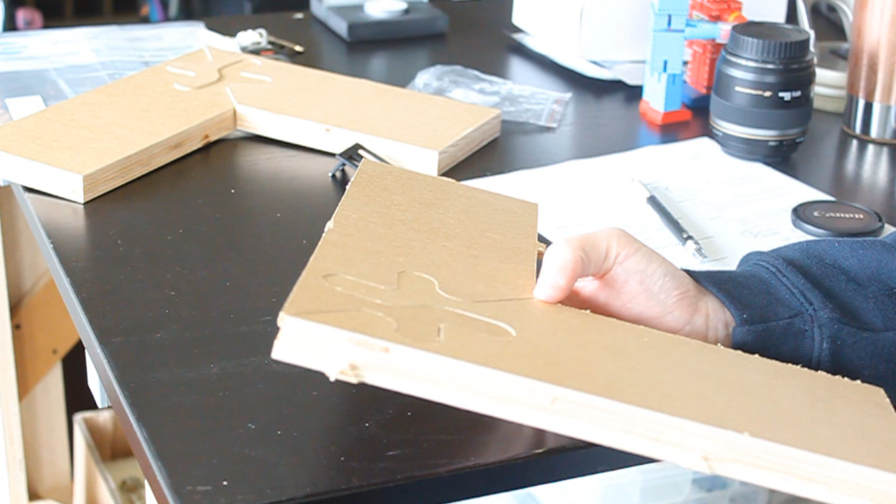In this video, I'm going to show you how to make a flat joint. It's a complex jigsaw type joint, and I'm going to make it a little bit more fancy than the standard joint. But in that, I had some challenges.

The amount of material matters because of vibrations, and you can see that there's a little bit of a sawtooth issue here. Getting the depth perfectly right is an issue. So for this particular type of joint, since it's two halves fitting together, you need to make the half depth perfect, and your spoil board needs to be perfectly flat and surfaced. Okay, let's get started.

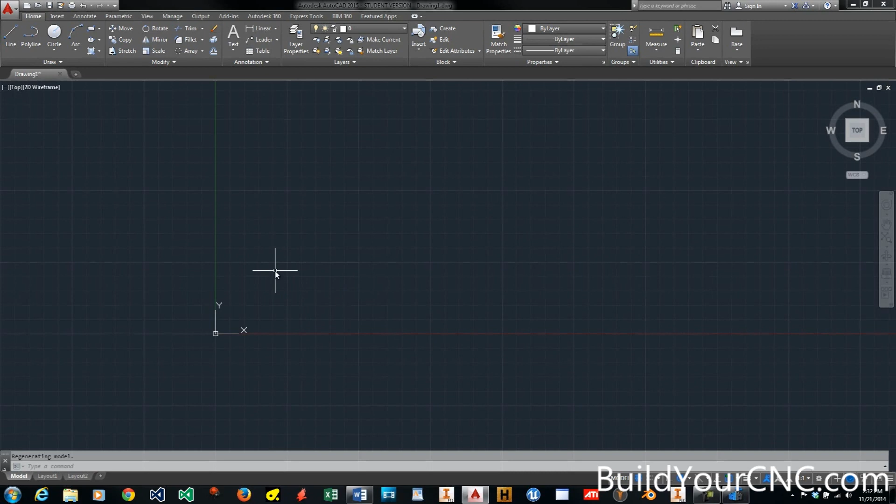I'm going to start out with 4-inch pieces of wood, like last time, but in a flat arrangement. I'm just making a line and I'm offsetting it by 4. I'll make it a little bit longer so it looks a little bit more like a frame.

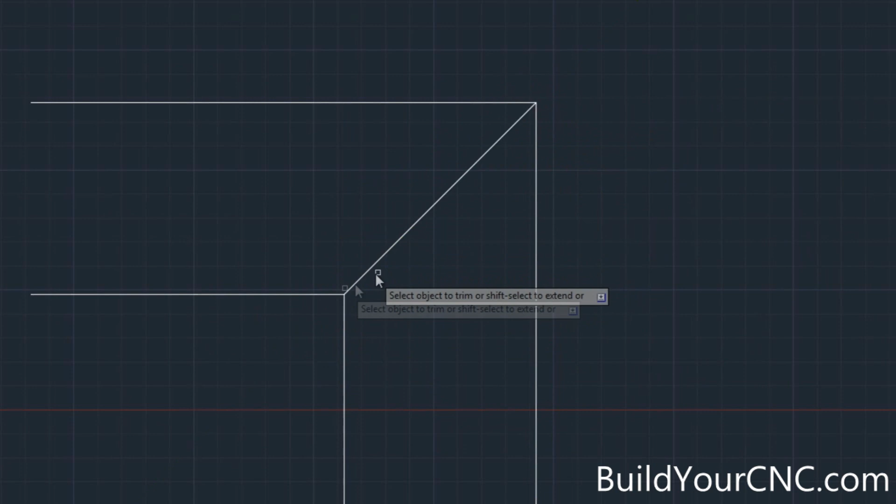And I'm going to mirror this at a right angle. A standard miter joint would look something like this. You can see it's generally just one line.

With a more complex type of joint, we just want to take a line and sort of move it around and then meet back at the other corner. But you want to make sure that there's enough corners around here that allow it to be locked in place.

For instance, say I'm just going to make a joint like this. You can see that the joint is here, but it doesn't really do any locking. You could still pull it apart.

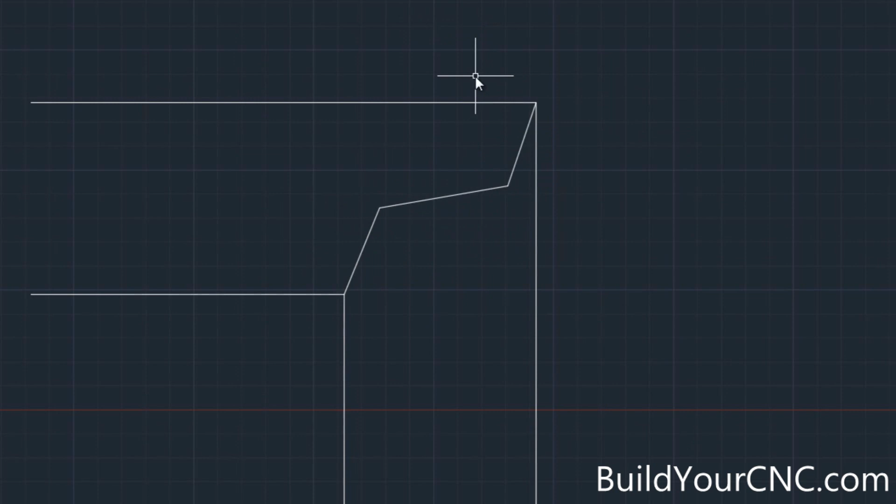Let's go back to the other form and let's get a little bit more drastic here. Now, this type of joint, you can see that you'd be able to lock it in place. You wouldn't be able to tear it apart.

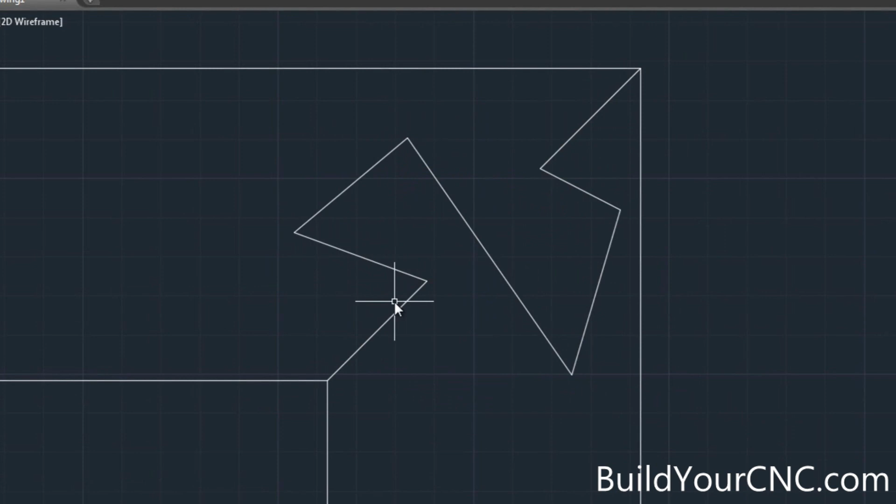And from here, you'd need to consider the size of the bit that you're using. So we're using a 1/4 inch, so you'd need to make the radius of all of these corners at 1/8 of an inch. And there you have a general joint.

But there are a couple problems with this joint, and I'll show you why. If you draw these lines, you'll see that the joint exceeds or goes across a boundary that we don't want it to. Because if we have just a straight piece of wood, we wouldn't be able to get this material all the way to the outside of this particular line.

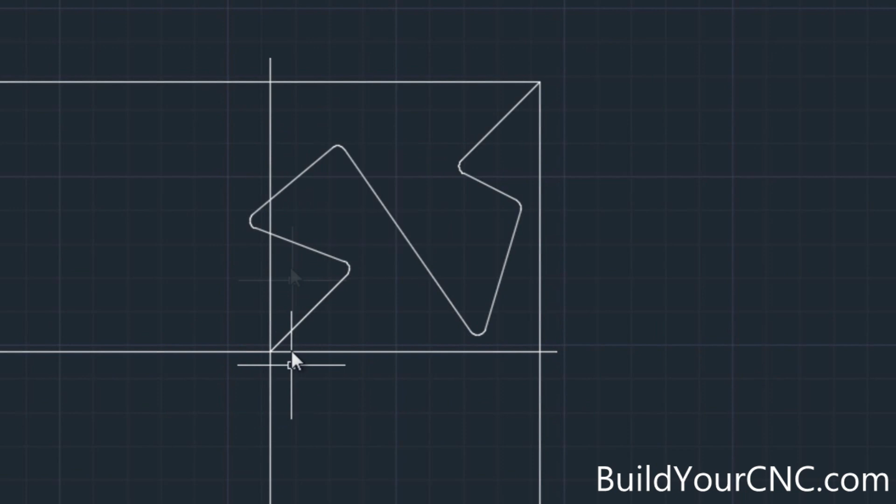So we need to work within this square. So let's remove this. And I think we can do better than this anyway. There's a lot of designs that we could create that add an attractive feature to the corner of the wood. Let's go ahead and put these other lines in here so we know where our boundaries are.

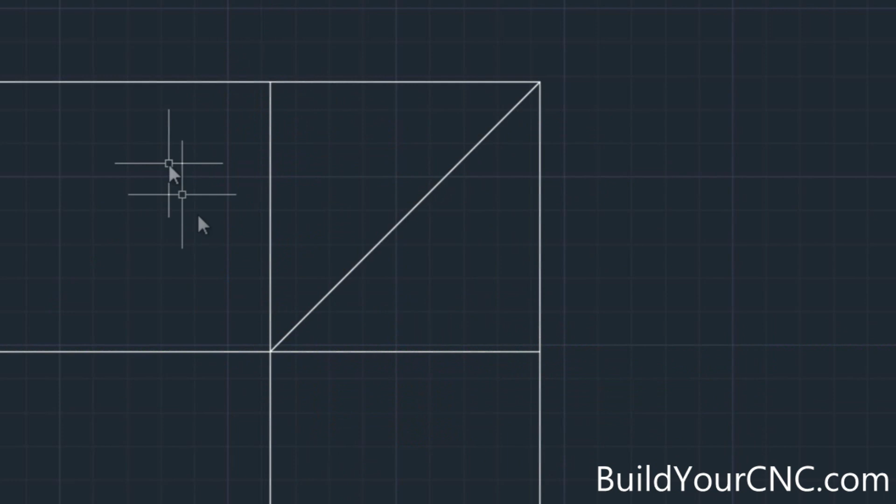And I'm going to create just a simple X pattern here. Let's experiment with this a little bit. I'm not sure I like that. Let's go with a circle.

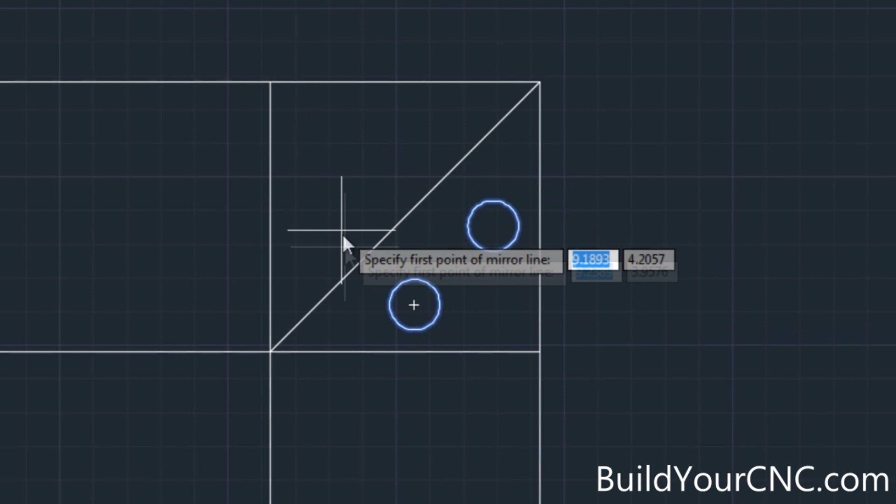Let's take the circle and mirror it. Yeah, that looks good. And then mirror it on the other side. And we'll take tangents. Let's get rid of some of the lines because it's confusing me a little bit.

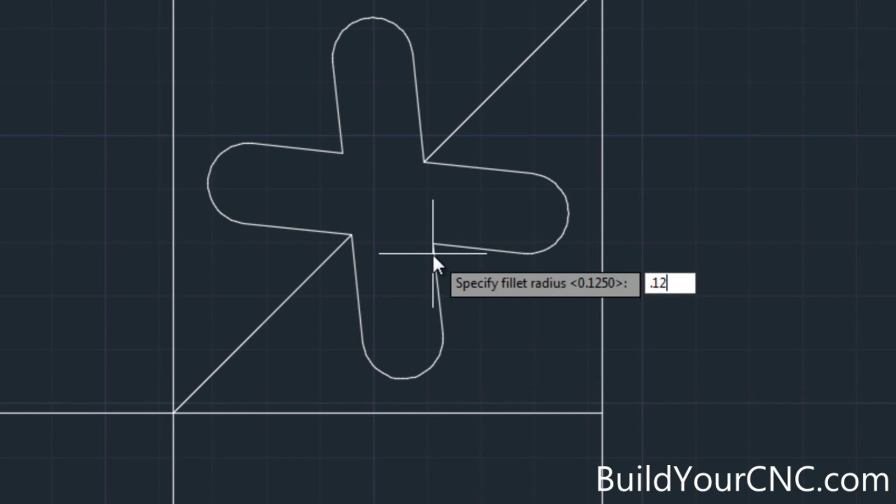We know these corners are going to need to be rounded for the size of the bit, 1/8 of an inch. And then I'm going to take this one, round it out here, and then this one is going to be rounded over here. I'm going to use 0.5 for that. Oh, that's going to be too big. 0.25.

And then just connect these. And I'll round these out. But we can see that there's a little bit of room. The end mill would have to be able to get through this area, cut all this stuff out, and then leave all of this material here, and then the opposite on the other piece.

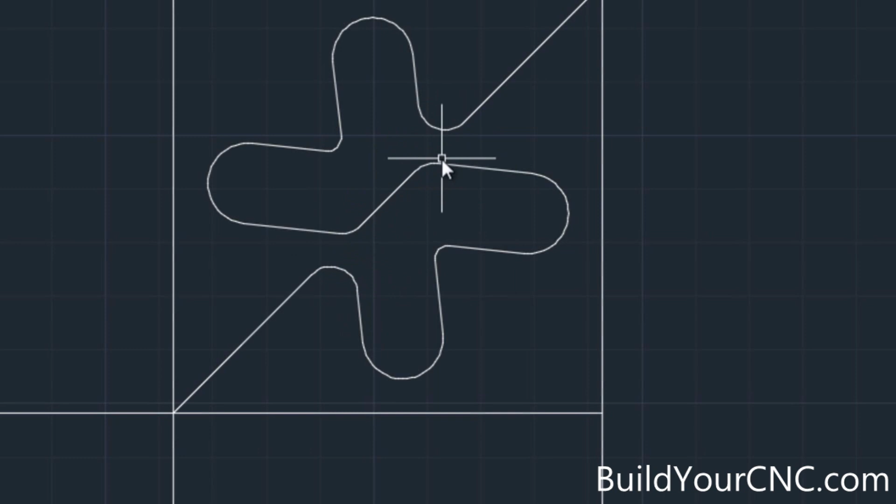And also this piece looks like it's really brittle, so it could break easily. So we'll increase the radius of the radii of these curves, and then also with this one. I'll start with these two since these are the smallest. Well, actually they're all the same, so I'll start with this because it looks like it's a tighter corner and it could use a little bit more smoothing.

Doesn't look like it went enough, so I'm going to try it again. I'll try 1. No, that's going to be too much. 0.75. That should work. And then I'll increase these a little bit more.

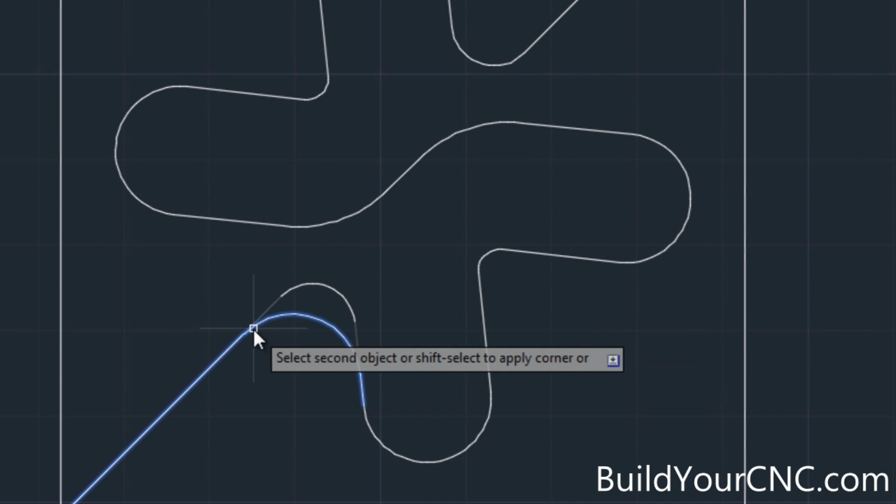Now this looks like a joint we can use. It looks like we made sure that it doesn't go outside of the boundary. I'm going to erase that, erase this one, and that's what the joint will end up looking like.

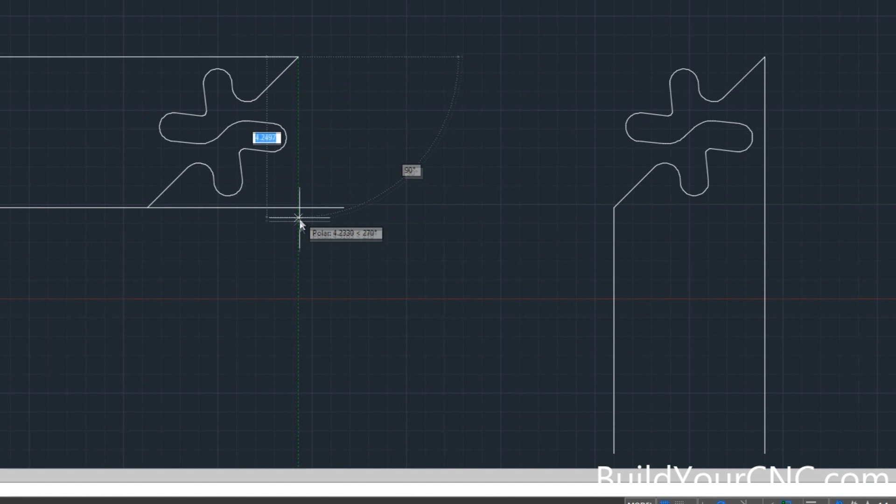So we're going to create 2 pieces from this one. Just make a copy, and I'm going to generate both of these pieces like this, but I'm only going to pocket this piece halfway through the wood. But this one will be halfway on the underside, so I have to make a line here. And I have to mirror it because the CNC machine, since it's only 3-axis, it's going to be able to do the pocket from the top.

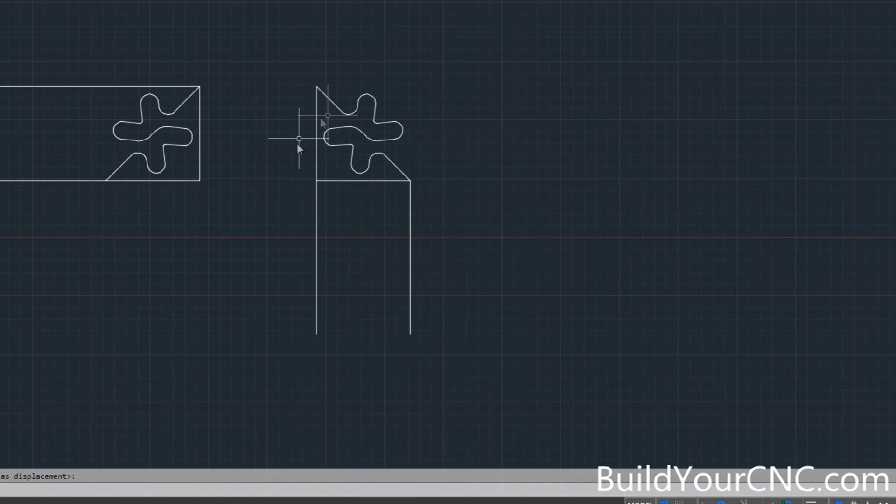So I'm going to mirror this. This way I can remove all of this material halfway down the wood. This will be the full wood thickness, and this would be the full wood thickness, and this part here would be the half wood thickness. So this would be able to marry itself very easily into this portion.

In the last video, in the finger joints, I used a 0 tolerance between this line and the other line, or the fingers. In this case, because there's so much geometry, I'm going to want to create more space between each piece, the puzzle piece. This puzzle piece, because this has more surface area for this portion of the wood to use for structure, I'm going to make this one the tolerance.

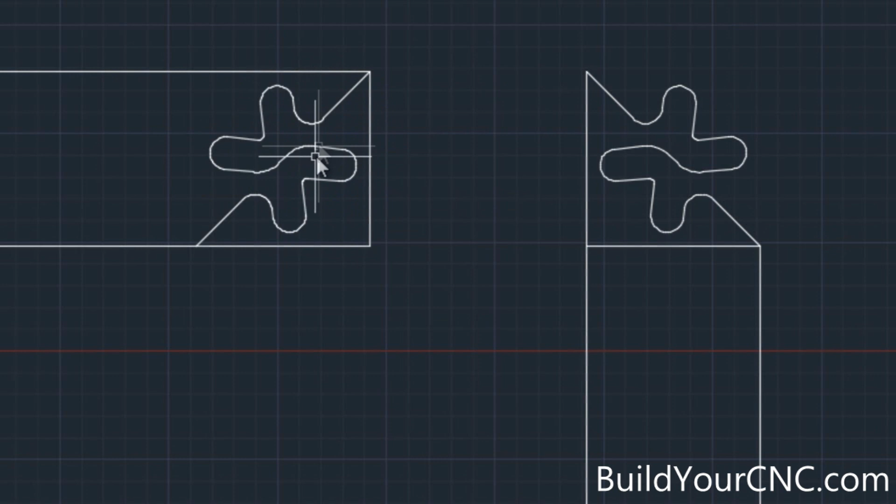I'm going to offset this geometry and make it smaller, so when this geometry fits over it, it should fit nicely. I'm going to try 5/1000ths of an inch, which is half of 1/100th of an inch.

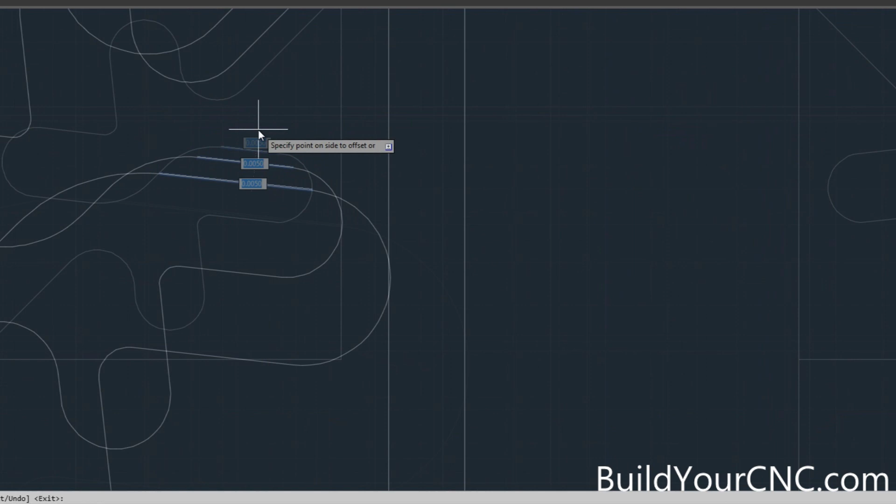This looks like it's really a small amount. I'm actually going to increase it to 1/100th. I'm not sure what I'm going to get, so I'm going to do a test at 1/100th and see what happens.

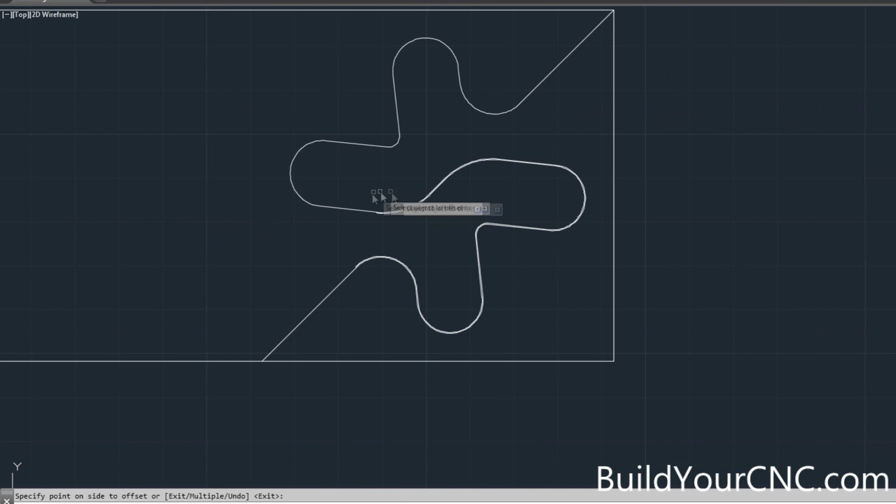Actually, I just noticed I'm going to have a problem right here because I'm making this circular area smaller than the bit is, so I'm going to have to make that a little bit larger. I'm going to delete these first, and I'm going to have to do that to both of these. So I'll make it 0.2. Yeah, that will work.

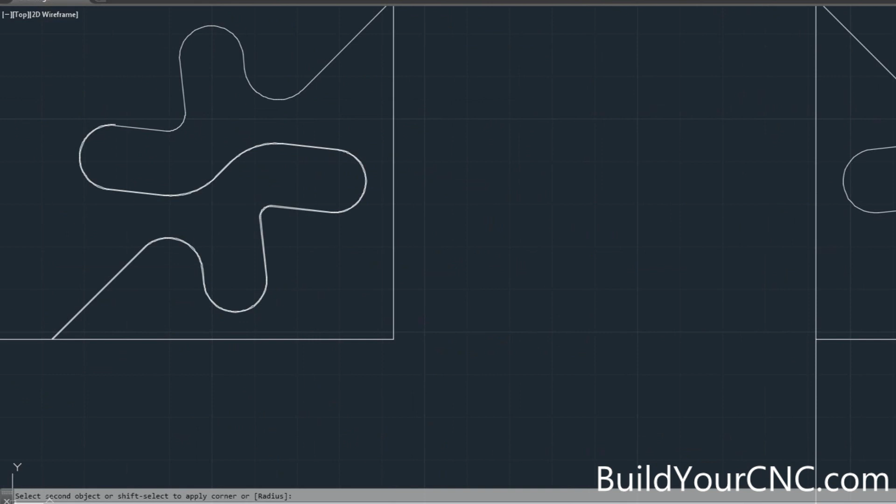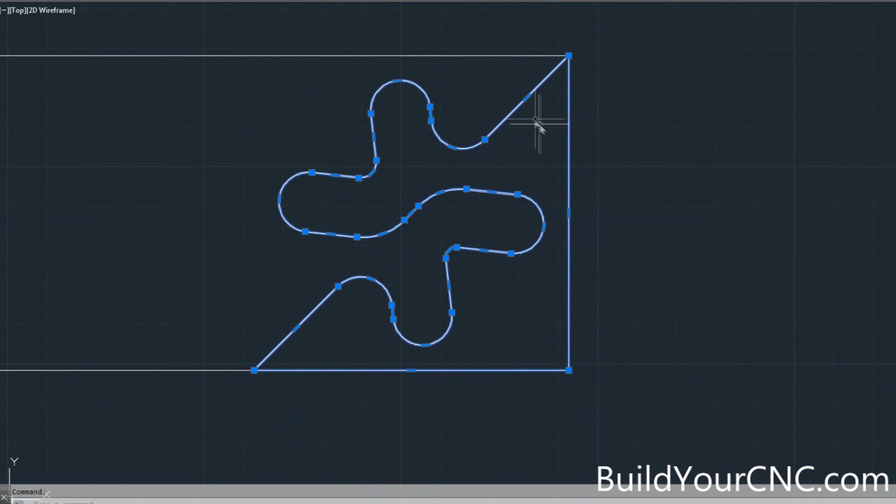Okay, I'm going to get rid of the original line that was there. Actually, I'm going to make this a polyline so I'll make them both polylines. I don't want to have these lines part of it.

Okay, so this one is 1/100th of an inch smaller than this one here, or offset. I'm going to put this back on here to see what it looks like, and see how I can treat where this ends up and this one does.

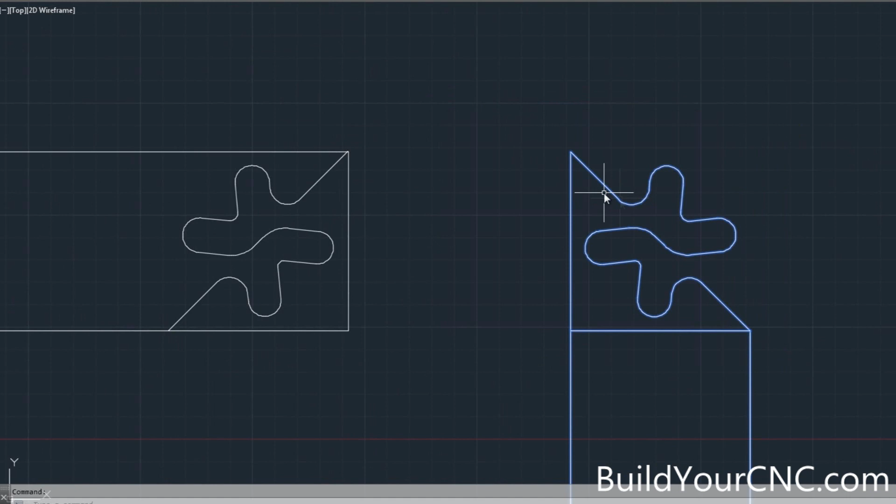So I'm going to turn this one into a block. I'm going to mirror it, move it right back where it was at that corner. So we can see this is the difference in space that we have from one to the other, and everything looks like it's right and offset.

So I think I'm just going to want to trim this off here. That should be fine. And this one, I think I'm going to trim it like so. Actually, I may not be able to do that with CNC, so I'm going to extend it. That way I can create some kind of pocketing that goes outside of this line, and it makes sure that it gets a good corner here.

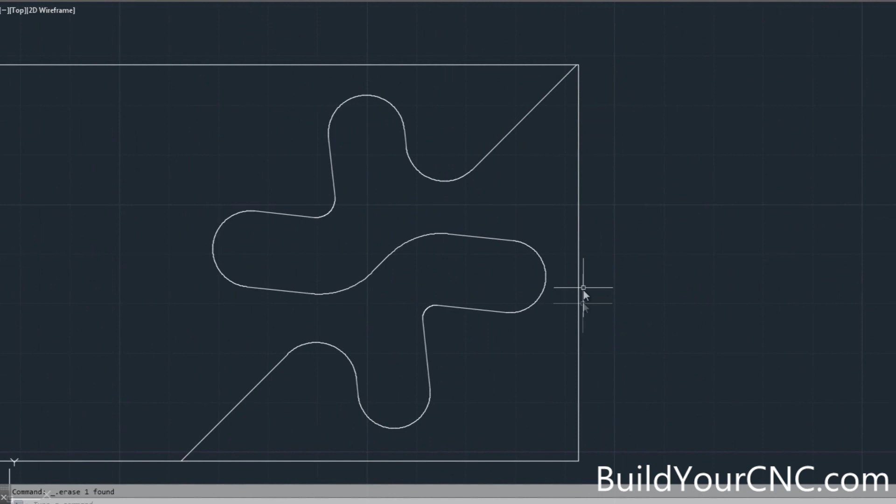Okay, I'm going to delete this and create a polygon that represents this pocket. I also want it to go outside of the bounds when pocketing, to make sure there's a nice corner around this edge. I'll use the BO command, the boundary command, which is really cool. It creates a polygon boundary. You can see it made a nice polygon just by doing that one command.

I'm going to make a little space here, break this up or explode it, and offset it to the size of the width of the bit. I probably only need to go half the width, just to make sure it gets to this point. I'm going to get rid of that actually.

I'm going to offset it 0.125. Yeah, I don't think it would hurt to go a little more, so I'll go 0.2 just to make sure. I'm going to take a half circle, and I can get rid of this line here. Look at that, that's why I didn't extend all the way.

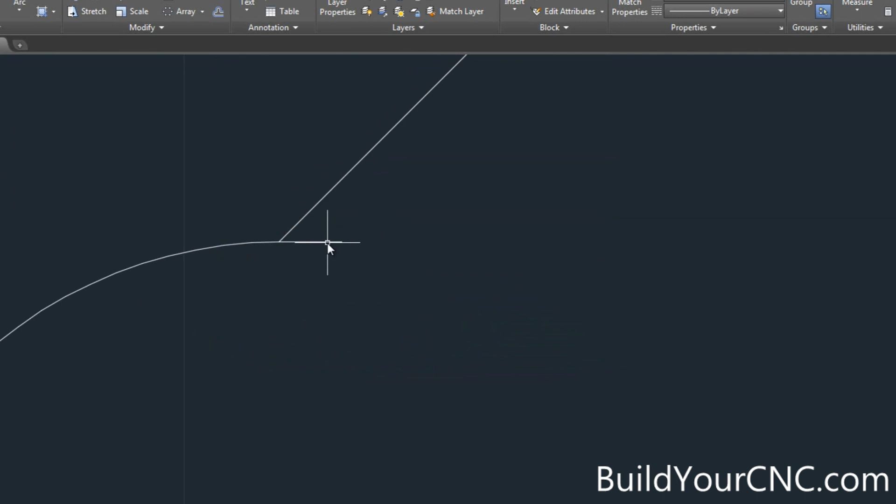So my bit will go all the way out here and create a nice corner, making sure it gets all of the edge. I can round off this corner here because it's in an inside pocket. This is an interesting case. I could extend this and then extend this line as well so it meets up with this line, but I'm just going to do a larger circle from this point.

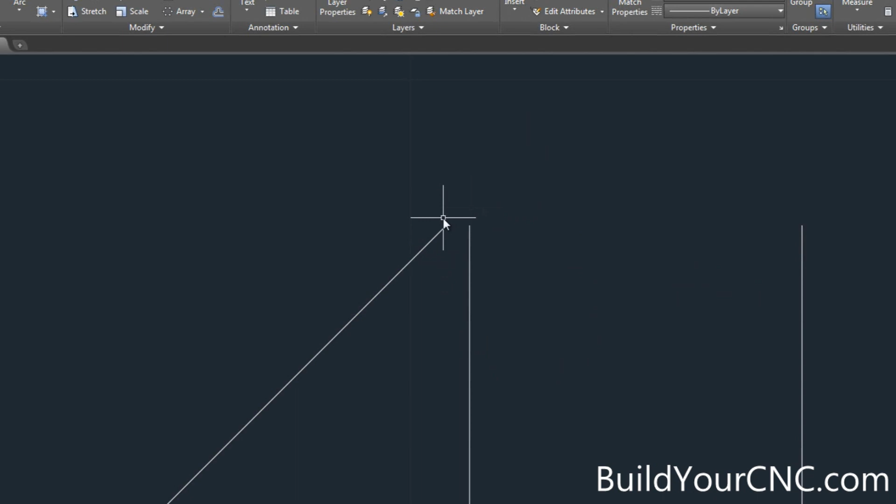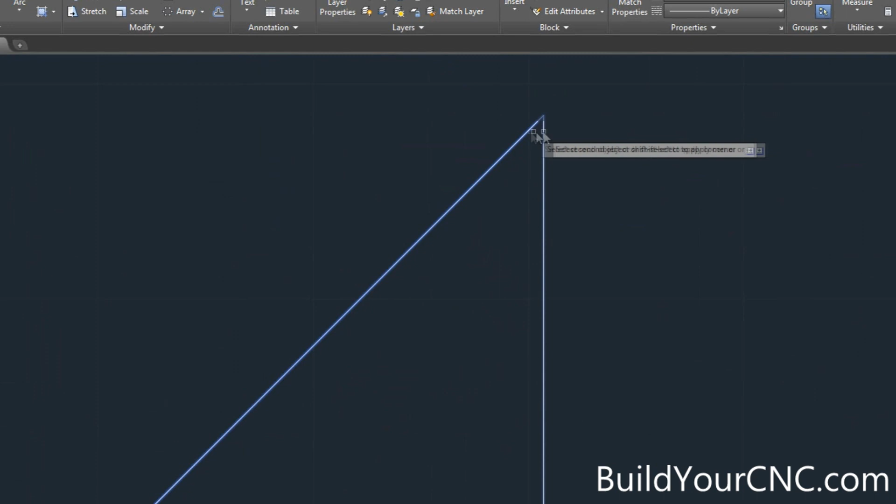On second thought, I'm going to undo all of that because I want to go out the full width of the bit—I just realized it won't fit inside that area. I'm going to extend this all the way here. So offset 0.125—oh, I'm sorry, 0.25. Now my circle.

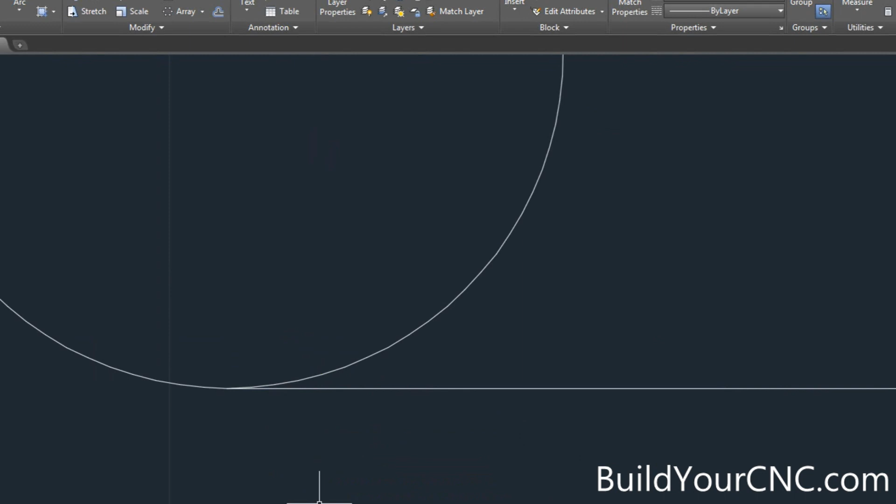Okay, this looks better. I'm going to make this back into a polyline. I can move any one of these points back. There, okay, so it'll pocket all of this out, and then I need it to also pocket this portion, so I'm going to do the same thing.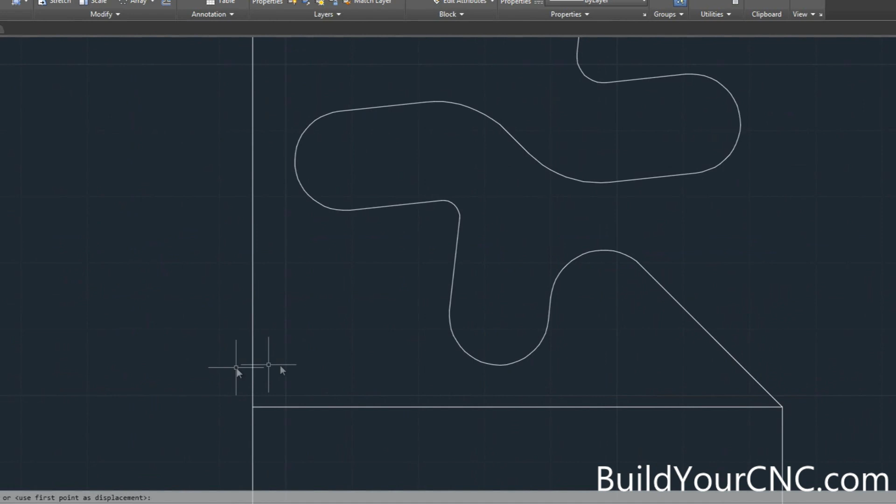I'm going to do a similar task to this one: make a boundary hatch, or boundary polygon, break it up, break, explode. Alright, offset 0.25, just doing it to these on the edge here. And make sure the inside corners—actually I won't have any inside corners.

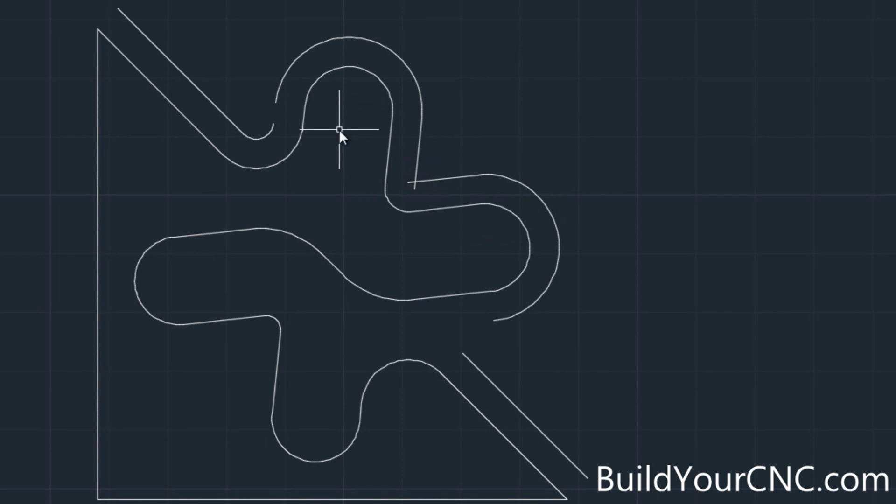Offset, got this one here. These can go ahead and be corners because this is an outside corner. And that one I can't do. Offset, I'm going to get this line down here. Okay.

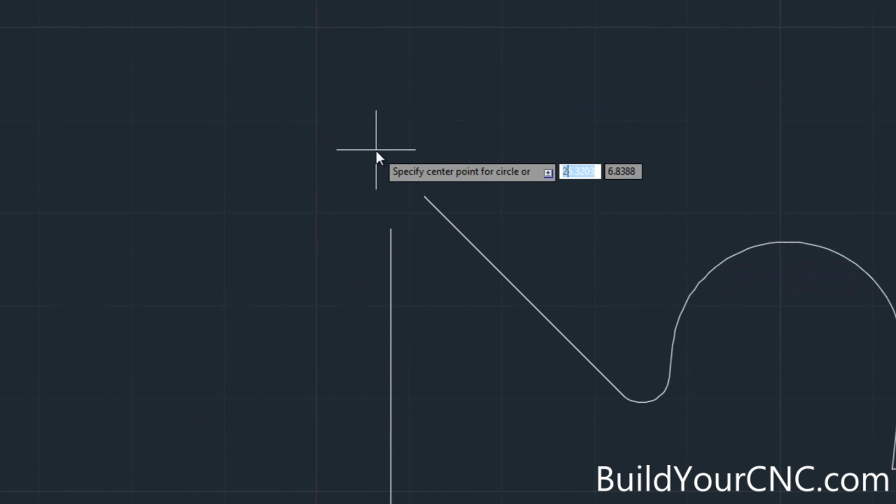Make a circle on this side. Okay, turn it into a polygon, join it all up, and move it back into place. So this will be my pocketing for the underside of this piece here.

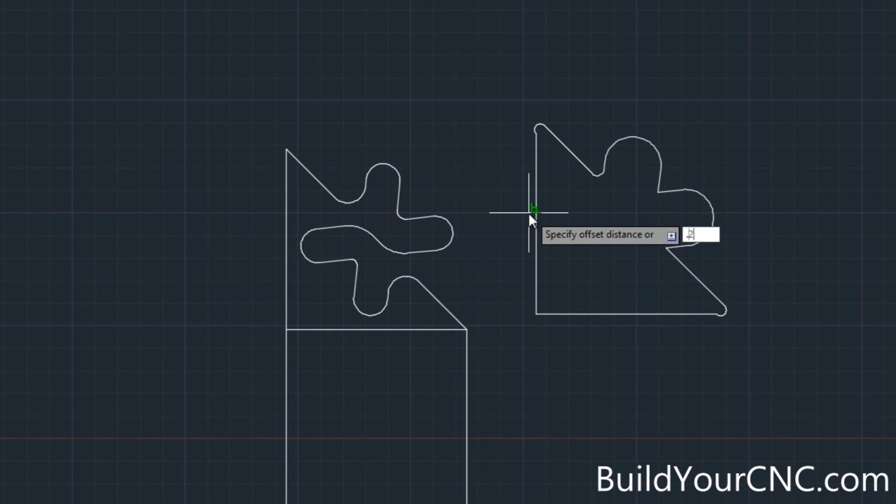Actually, I may have to do it on this side too, so I'm going to break this again or explode it, and get rid of this. Let me get that back. I'll do a 0.25 radius circle around that, and then a 0.125 here. It should be able to get a nice corner in at this point.

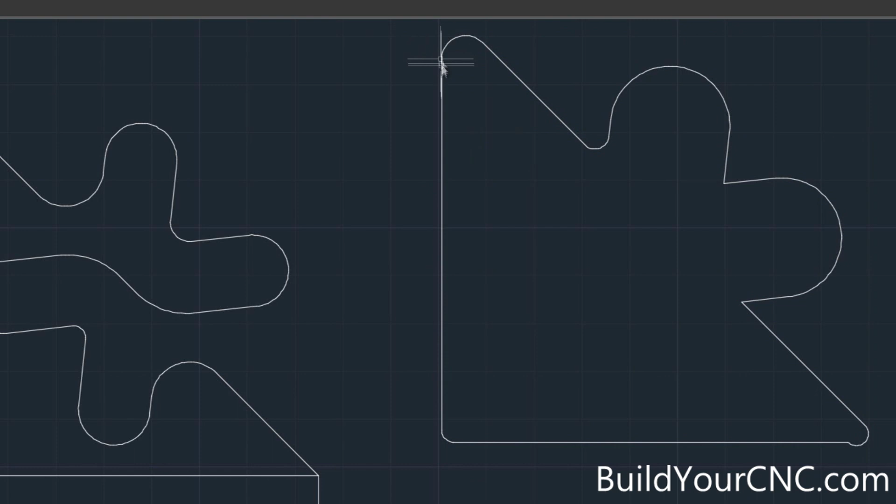That's not where I want it. There. I almost lost my position, but I still have this one here, and this was 0.125, which is half of 0.25, so I just moved it over another 0.125. So now this is positioned correctly, and now we're ready to create the boundaries for the actual profile to cut out the piece.

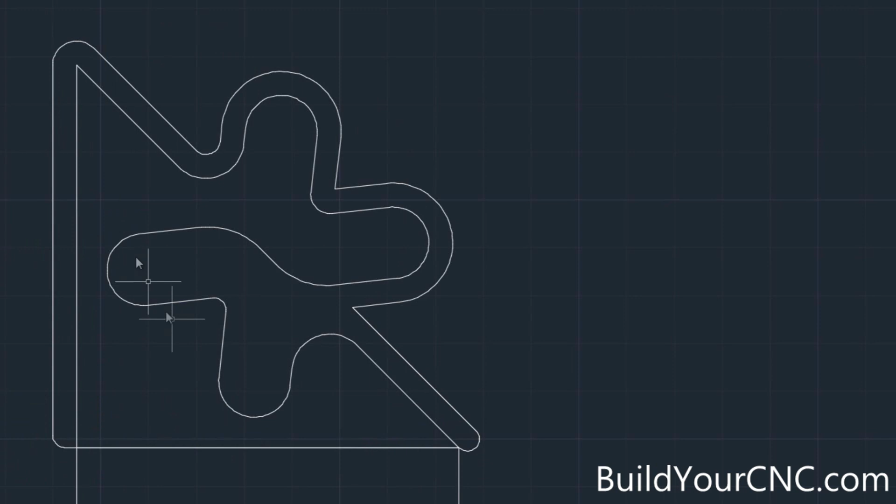So I can get rid of that line that I have here, if I have one. Do I have one? Yes. I'm going to explode this one and get rid of this because I don't need that anymore. I need to be able to cut this out, so I'm going to put a line here.

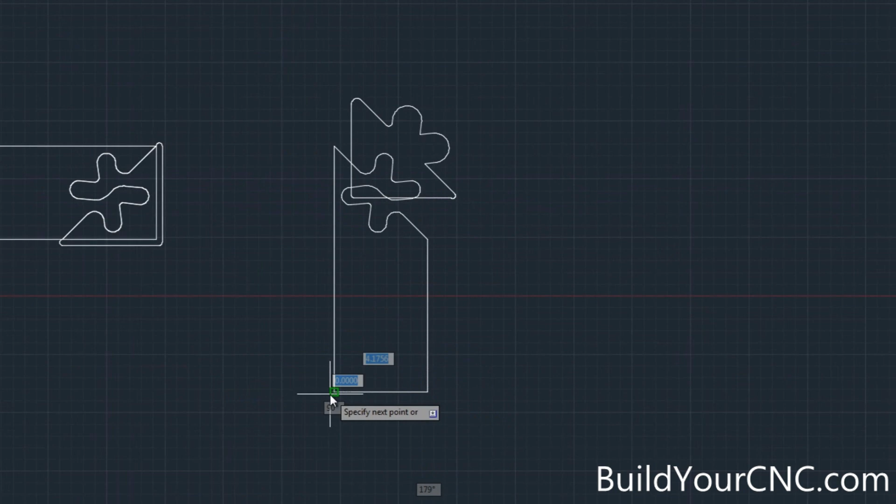I'm going to rotate everything so it's in alignment—can save material. Oh, let me join this first. PEDIT. Okay, get it to a closed polygon.

I need to do the same thing with this one. And this one we only need to cut out the square because we've already pocketed this portion out. So we just need to cut out this square, and it looks like we already have one. That's interesting—I have something here. We'll replace this with a rectangle. Maybe not.

Alright, now I've got a rectangle. I don't really need this information here, so I'm going to delete it.

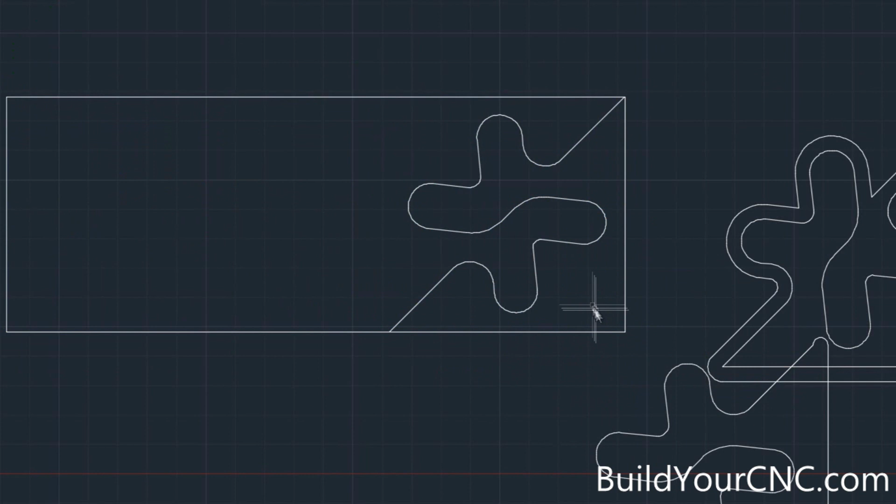Actually, I'm going to first move my pocketing into position. We can now save the file and go into our CAM program.

Okay, let's go ahead and start up CamBam. Let's load the saved file in documents. There we go.

Okay, we can start with creating the pocket for this piece here. Select the polygon and use the pocket machining operation.

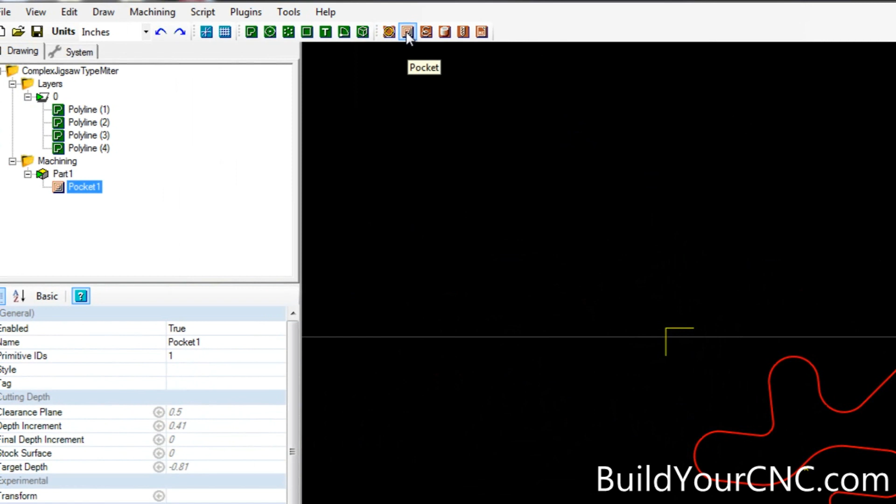And now we have to figure out the target depth. I have to go and measure the actual thickness of the wood I'm going to be using. Okay, the piece is 0.76.

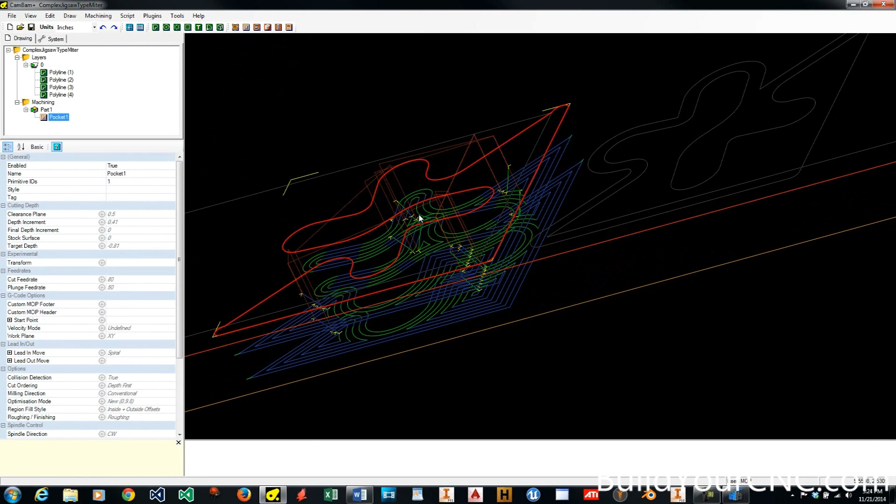So this needs to be half of 0.76, which is 0.38. So my target depth is going to be 0.38.

So it'll only go 0.38 down, and I'm going to do the same thing with this one, but let's first cut this out. After I inspect all of this, it looks good.

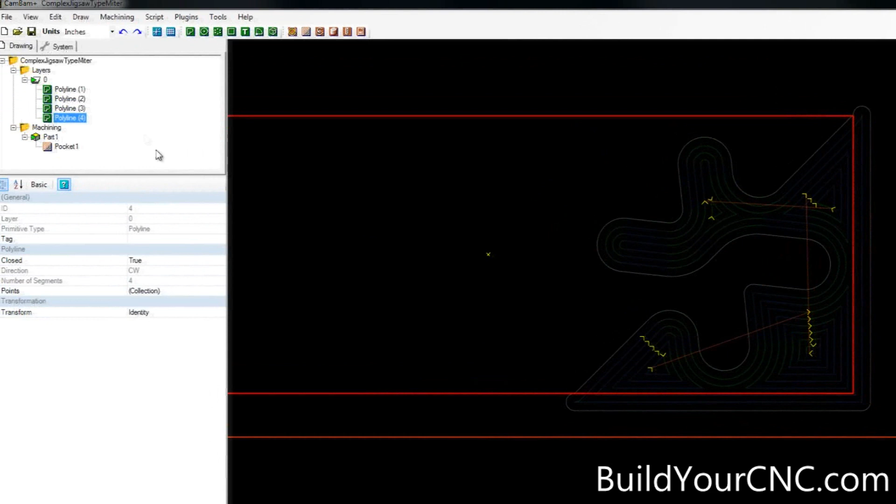Okay, so I'm going to profile. Actually, I'm going to do two passes here. I'm going to do an inside profile on this one, and it's going to be a finishing profile, so it'll be right on the line.

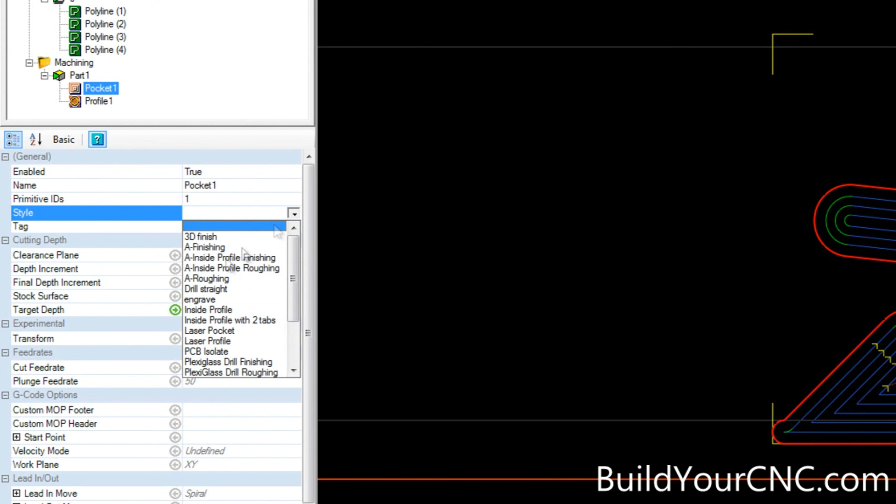But this pocket, I want to make it a little bit off, so it's going to be a roughing pass. You can see that it won't go all the way to the edge, so the very last profiling will skim off the edge just a little bit.

So it'll make it really nice and precise.

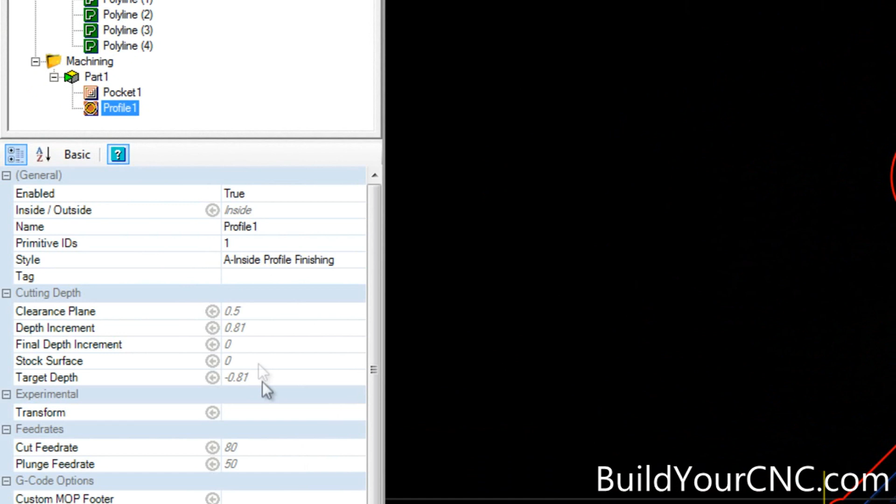I also have to make sure that this profile is 0.38 and check to make sure that's correct. Yes. So now I'm going to do an outside profile, two of them, one for finishing and one for roughing.

Now I'm ready to do the profile for this, or the pocket. And this is also going to be 0.38. And the pocket will also need to be roughing.

Then I'm going to do an inside profile for finishing. This one also has to be...

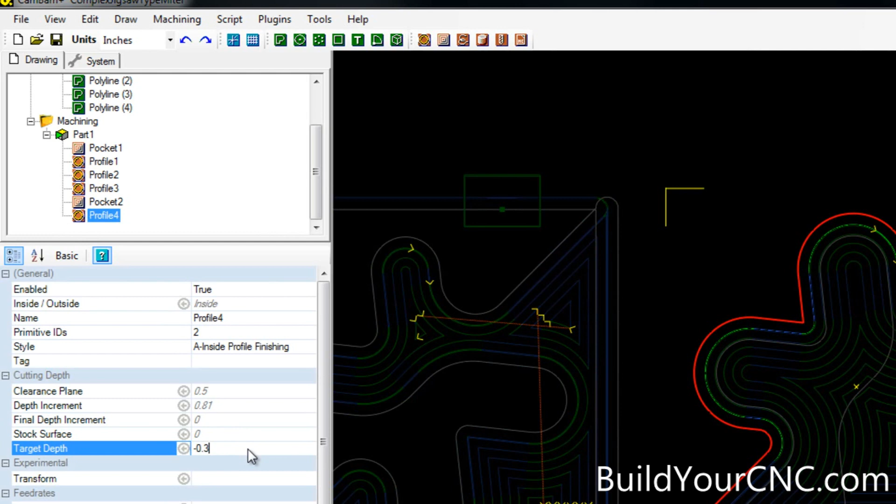0.38 depth. Yes. Okay, now all I need to do is do this outside profile and we should be done. So a roughing and a finishing pass.

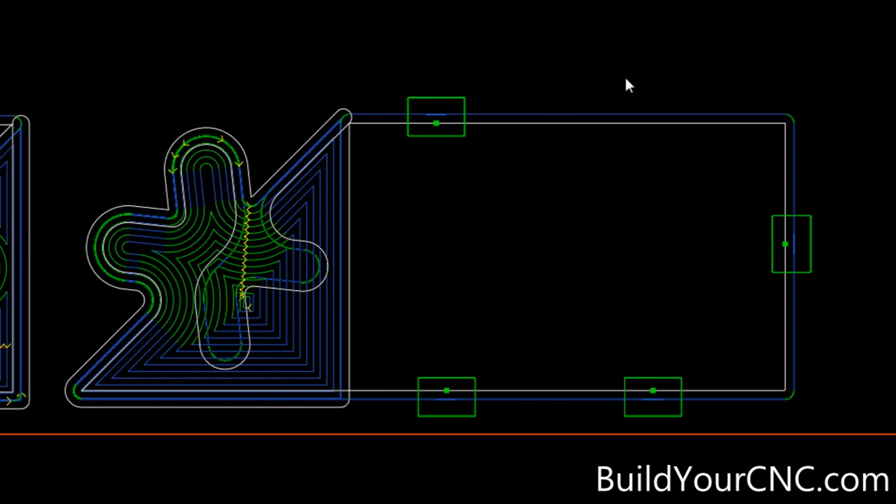I think we're ready to put this on the machine, so produce G-code and run the machine.

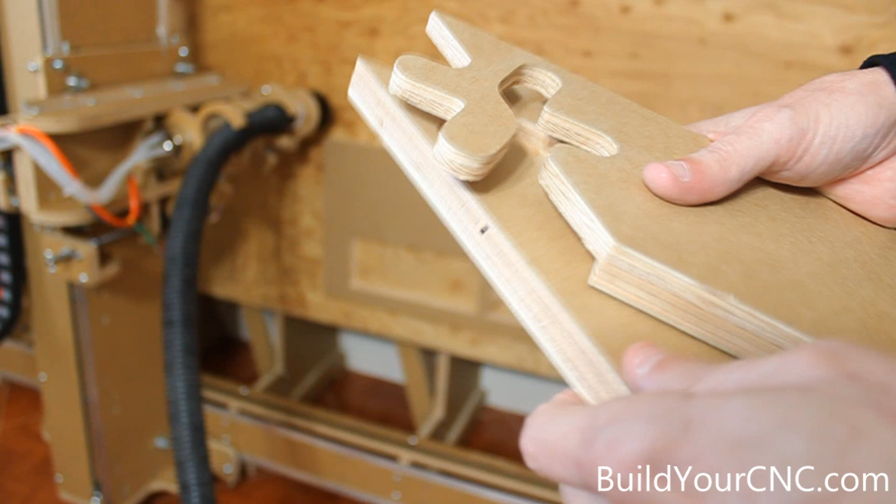So here are the pieces that came off the machine. You can see the way it was pocketed so it can lock in together. It looks like I haven't made enough of a tolerance allowance between the two. It still can lock together, but if I add another 1/100 of an inch around, it should work fine.

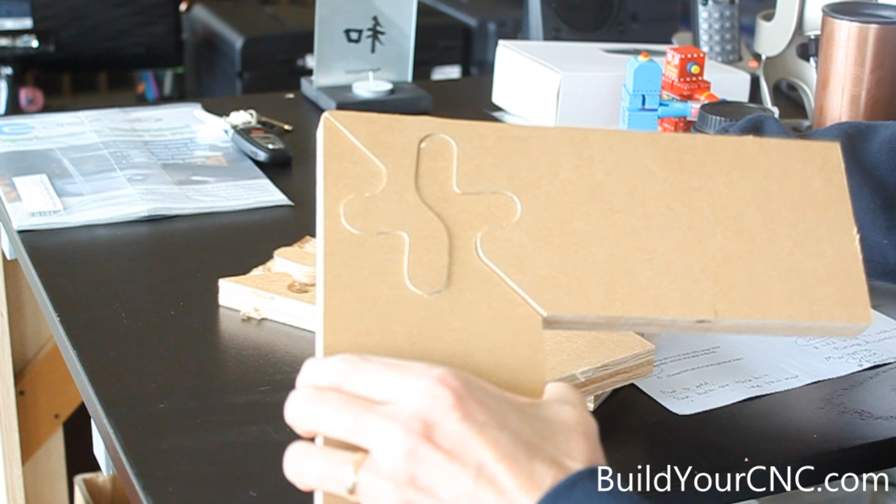Okay, I've just finished the runs on my CNC machine. This is the first one I did, and it has a tolerance of 1/100 of an inch. You can see that it's also not level because I didn't go deep enough on the pocketing, and it was really hard to get this together.

So this is my first test, and it's a challenge to get it to the right tolerance. So I did another one, and this is at 2/100 of an inch. I'm just taking one side down 2/100 of an inch.

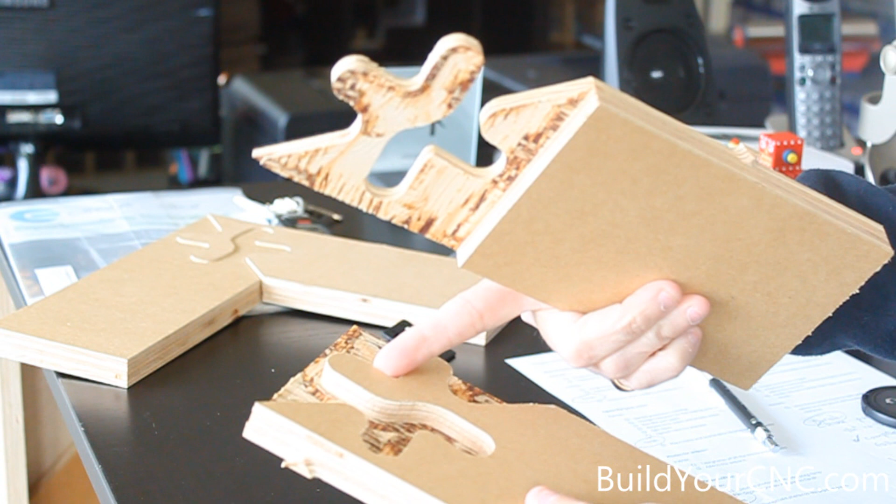This one isn't affected at all, just this one. And it is essentially 1/100 and 1/100 if you think about it as a tolerance on both sides. And it slips in pretty nicely.

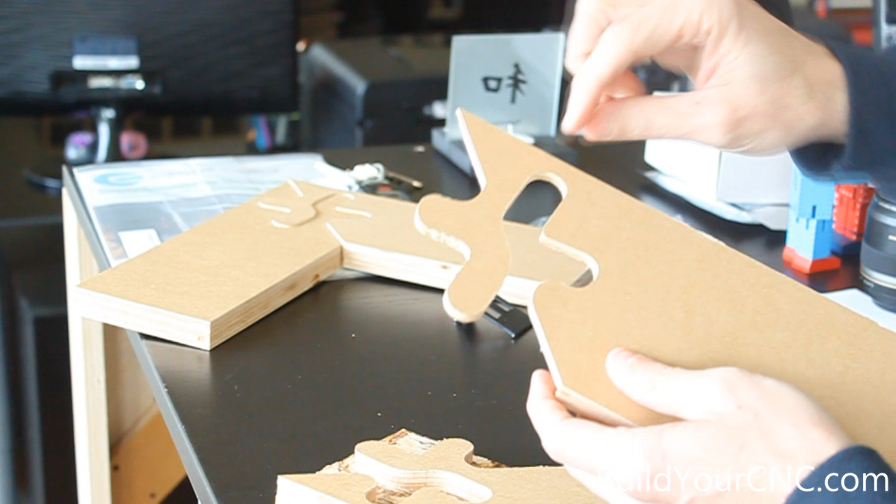There was an issue I had right here, and it's because I made this portion of the design too small. It wiggles a little bit, and when you have it in the machine, it's going to start vibrating.

And then this kind of thing will happen, where you have a sort of a sawtooth look because of the end mill running around, and it's vibrating and causing this thing to vibrate pretty violently.

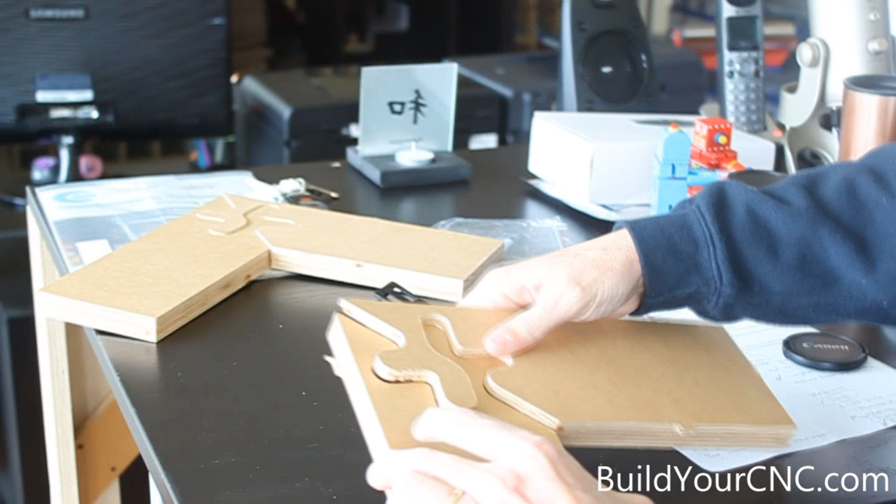So let's see if it fits. And this one I also went a little bit too far in the depth, but my machine, I didn't do any spoil board surfacing. There you go. You have the jigsaw miter flat joint.